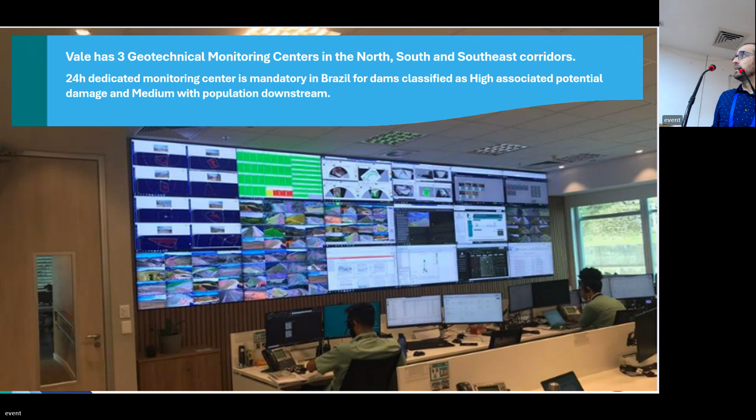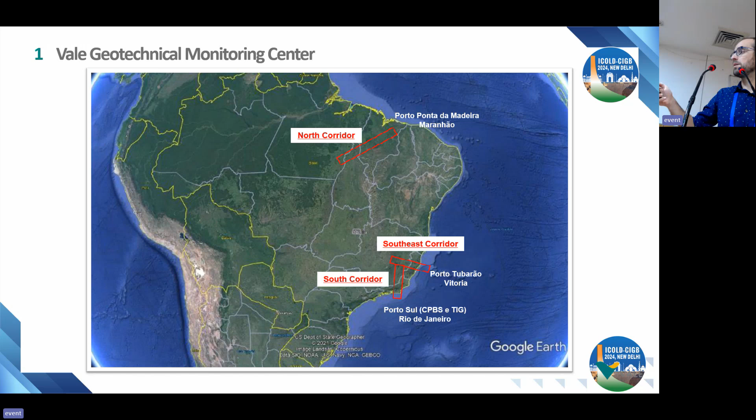So we'll talk about the corridors. They're pretty much what connects the mines, the railroad, and the port. That's why we have three big corridors in Brazil.

This is the team involved with this. We have teams, of course, 24/7 to do all these tasks you can see right here. We also have a geotechnical engineer team. Based on my understanding, AI is not ready to take over the job of these guys, so we don't have to fire them for now, which is good. So it's still human beings doing the data analysis and investigation.

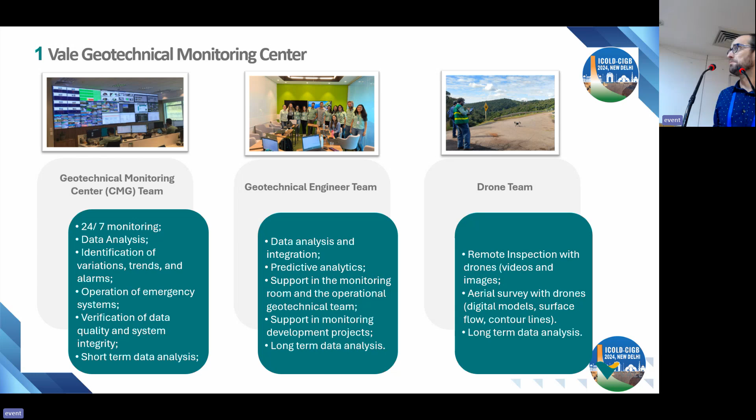And we also have a drone team. Just to show you some numbers: one of the corridors, the South Corridor, does the surveillance of 50 dams, so it's a big quantity.

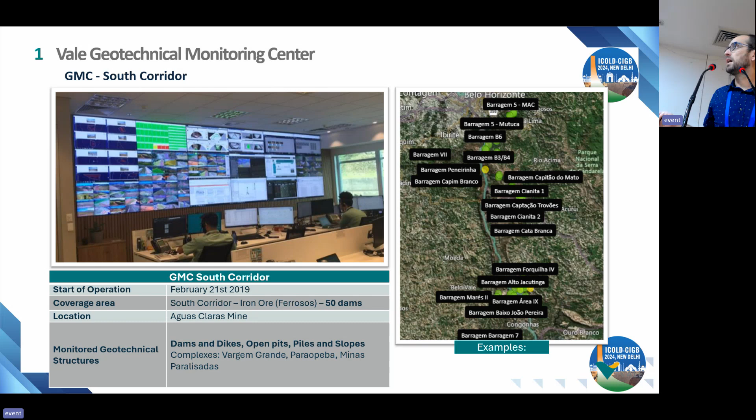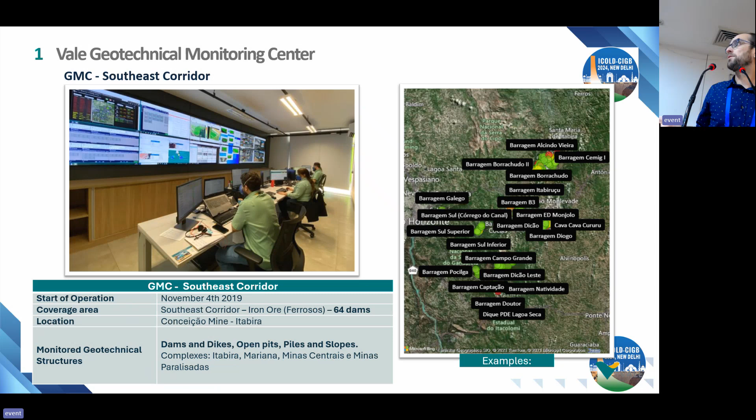So we have big screens. If you come to Brazil to visit, it's pretty interesting. The Southeast corridor covers 64 dams. You can see the start date of operations here - Brumadinho happened in January, and one month later we had this monitoring center in place. This one was set up the same year, and the third one, the North Corridor, one year later.

So today, for dams classified as extreme or very high consequence, we have these monitoring centers.

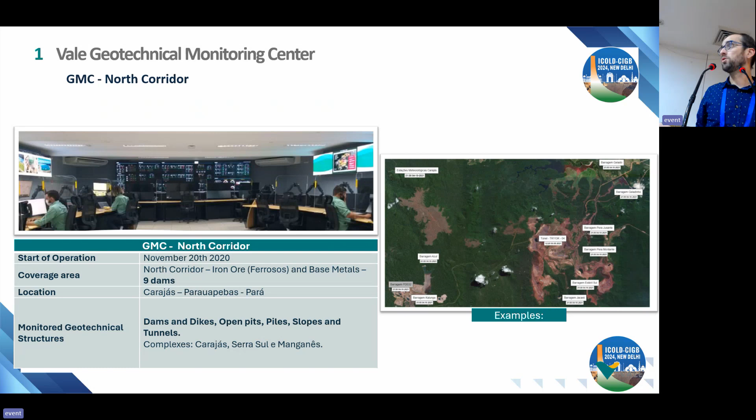And the devices are here, so more quantities and numbers of instruments. As my colleagues here said, they're not here for fun. And of course it would be meaningless to have this quantity if it wasn't connected to a failure mode. So it's not just dropping fancy instruments there - it needs to be connected to a failure mode. I heard this many times here, and I was happy with that, and we do this.

Now, I said I'm the risk guy, so we do risk assessments, and during the risk assessments this is exactly what we do. We also check which instrument can prevent a major failure and detect which one is really important, really critical.

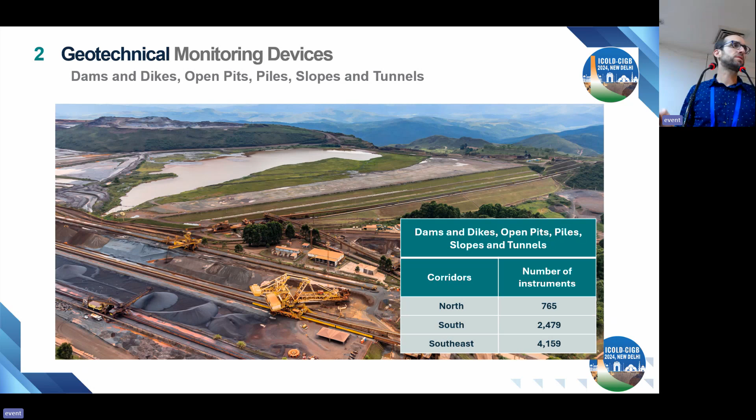So we have another system where we flag a few of them as critical, so they receive more love, let's put it this way.

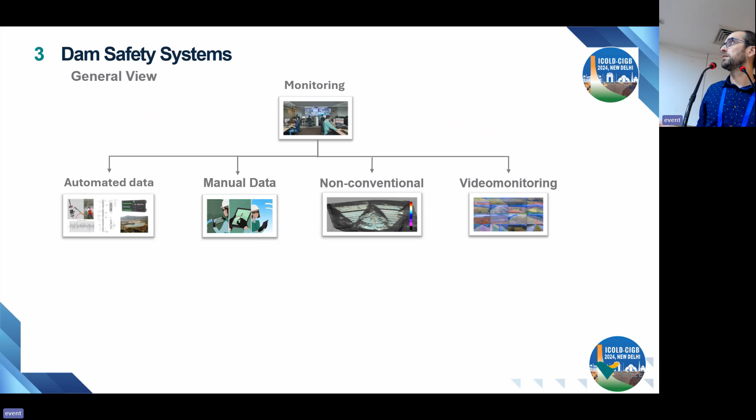In terms of systems, we have automated data, manual data, non-conventional, and video monitoring, and all of them go to this system because we don't use spreadsheets, as we talked about earlier. So we have a system to receive all this data, process it, and also handle site inspections - this inspection also goes inside this system.

And also when maintenance is required, the site engineer will indicate, okay, we need to clean the superficial drainage or cut the grass or whatever. This is the system where that management is done. And the second one is more visual.

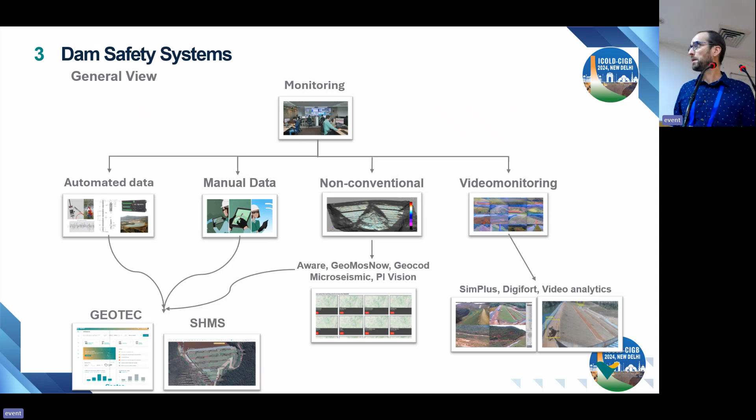It's because all the instruments have thresholds, and when we reach some of the limits, it pops up on the screen of the people monitoring these things. So there's a bit of communication involved.

So we have the Geotechnical Monitoring Center. The EOR has full access to the data, so the EOR doesn't have to ask the site engineer to get the data, because otherwise you could create a filter on this. So he can, I don't know, Sunday evening instead of Netflix, go and see a camera of his dam or her dam, how it is, and how it's behaving.

So we have this full system here, also connected to the RTFE. And also reminder, we also have ITRBs. Of course, ITRBs do not need to have access to look in details, but it's also checking the health of the system.

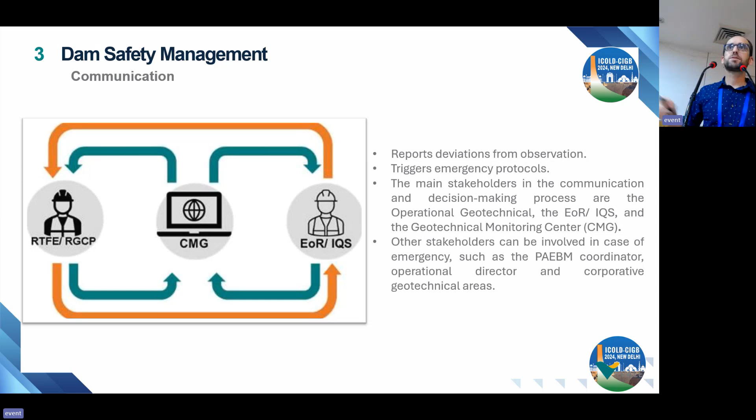And something else happening in Brazil right now: the legislator is asking to have access to the data. So that's something that will happen soon, maybe become a law. Since Brazil sometimes we create new trends in legislation, this is another one coming.

One of the things that's also different in Brazil is the sirens. It's mandatory to have sirens for all dams with extreme and very high consequence. So in Vale we have 380 sirens. It's a hell of a job to maintain and connect all these things.

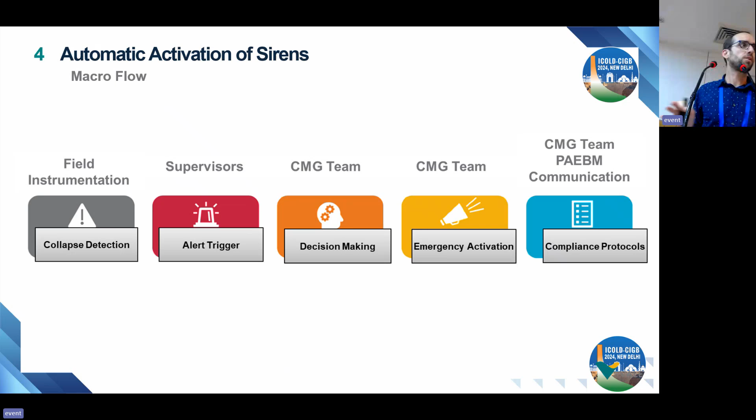So I will show which instruments will detect any collapse, and this is the communication flow, let's put it this way, because it's not just that if an instrument detects something, we still need someone to make sure it's not noise. I'll explain better here.

So I'll show on my remaining slides which are the instruments that automatically activate sirens. One of them is radar, the Doppler, right here. It's automated, but it's not fully connected.

There is a field, it still goes through the monitoring center, because what happened is exactly in this case, we had a bird that came. If it's a bird that goes a certain way, we're not making too much of it, but this bird passed exactly in a way that indicates the dam is falling. So you have someone in the monitoring system get this alarm, and this person does a quick check, sees the camera, and says okay, no, it's false. So we will not activate the sirens, which is a big thing -

because you'd have to evacuate a city of 20,000 people, or rather the affected people there.

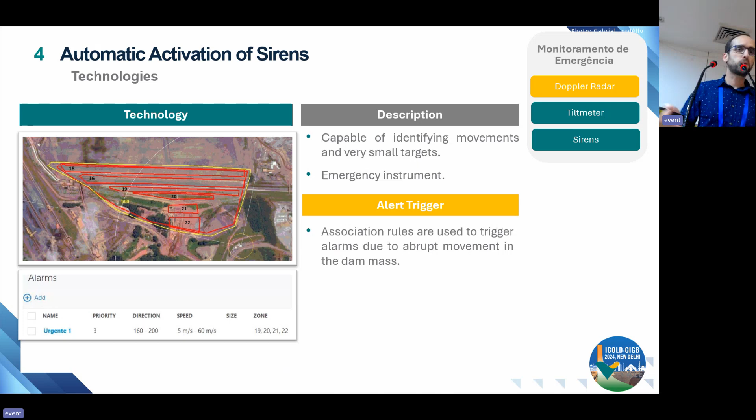And the tiltmeter is another instrument that we use for this. As you know, the alert depends on the variation of the inclination.

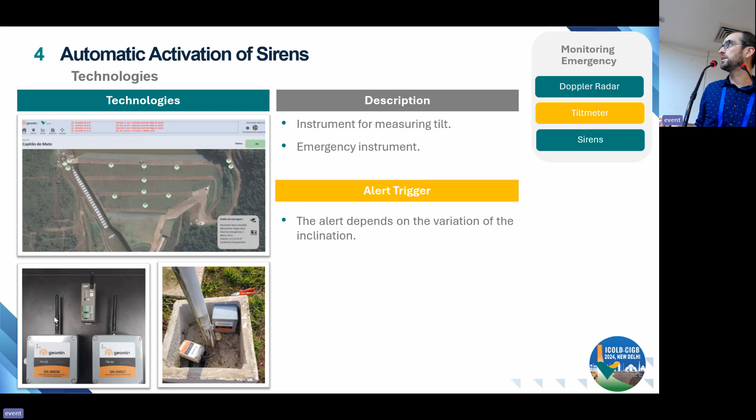And this is my last slide, about the siren itself, confirming what I said here. This is the quantity of sirens that we have, but it's not enough. We are struggling to be able to buy the quantity that we need.

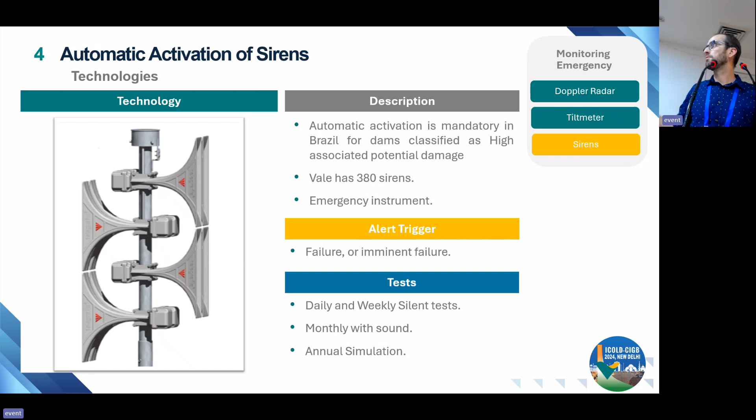So my colleagues went to Norway to find ways, because now we're also trying to integrate all these sirens globally with the government - I think in Norway they have this integrated system. But anyway, I deviated here. The point is, they have silent tests done daily or weekly. We have monthly tests with sound, and annual drills including evacuation of the population, and of course with the sirens being used. So yeah, that's it.

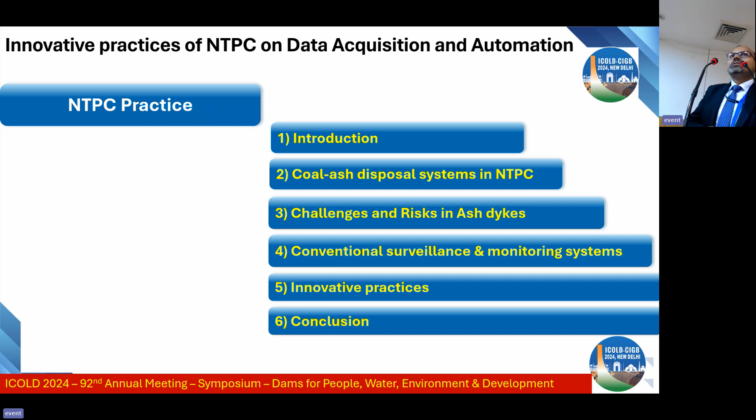In the introduction, you can see the picture.

In typical Indian thermal power plants, we burn coal and ash is generated, coming in two forms. The coarser fraction is bottom ash, around 20%, and the fine fraction is collected in electrostatic precipitators, around 80%. The fine fly ash is in the range of silt to clay particle sizes, having pozzolanic properties, but the bottom ash does not have pozzolanic properties; it is rather medium to fine sand.

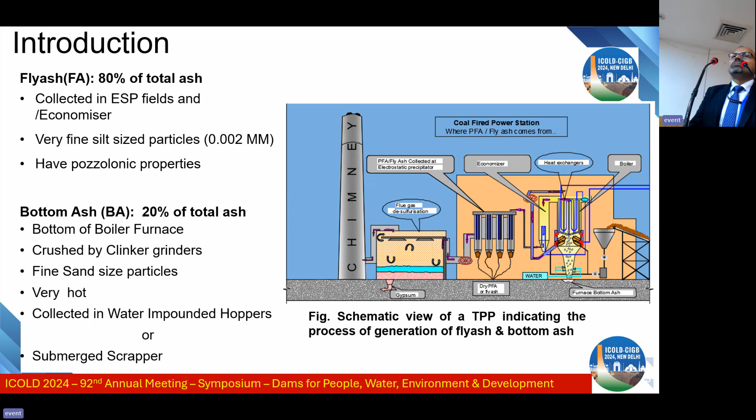Understanding all these properties of fly ash and bottom ash, we are designing our ash dikes as tailing dams, and using these materials in constructing the tailing dams. So what are the different lagoons we are adopting in disposal systems?

At the top right, there are three lagoon systems: two bottom ash lagoons and one HCSD lagoon. HCSD is a high concentrated slurry disposal system which we have evolved in the last 10 years to dispose fly ash, basically to reduce the impact on the water environment by reducing water consumption.

Earlier, we had been disposing ash in the ash pond lagoons using the wet slurry method. With the adoption of this high concentration slurry method, the environmental impact is now minimized.

At the bottom right, you can see different sequential dikes at the periphery, and at the right most there is an overflow lagoon. Initially we construct the starter dam, shown in blue at the starter phase, and then progressively as the ash pond's capacity gets exhausted, we construct raising dikes using the tailing materials itself.

Fine fly ash is used in the raising construction, and bottom ash is used in the internal drainage, chimney blanket, and rock toe filters. This way we are using our tailings in the construction of these tailing dams.

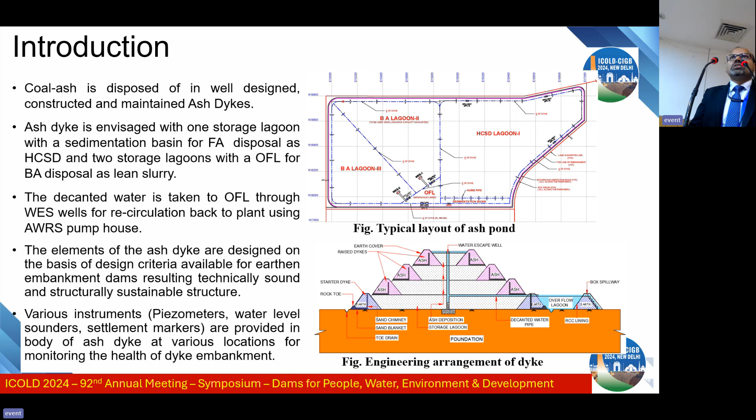So what we are doing is reducing the impact on water also. Initially we take water for making ash slurry, and then continuously recirculate it. This way water consumption is reduced, and by adopting high concentration slurry for fly ash, we are reducing further water requirements.

These are the typical coal ash disposal systems adopted in NTPC. At number one, wet disposal in the ash pond - a typical wet disposal system. Second is the high concentrated slurry disposal system. Third is the dry disposal system, where we create ash mounds.

Recently, we have adopted ash mounds in new plants also. Previously, we have already achieved dry ash mounds up to 55 meters high.

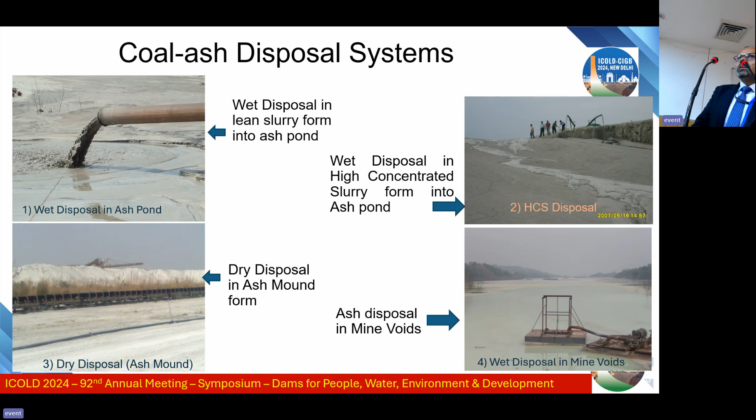And then mine voids - the coal mines from where coal is coming - after abandonment of the mines, we are backfilling them with coal ash as a wet disposal system, reflected in system 4.

There are some geotechnical challenges we face in the ash dikes, which are a kind of tailing dams, related to safety and stability. There are seepages from the dike body, issues of distress and settlement, and issues of longitudinal and transverse cracks, erosion of the downstream slopes, and rain cuts.

During ash evacuation, there is distress in the upstream slopes, and rat holes leading to piping. Non-uniform filling of the ash pond is also creating fugitive dust emission and environmental pollution.

Overfilling above the freeboard level has also been an issue. Vegetation on the downstream slope of the dike body, due to climatic conditions, has also created distress because if huge vegetation is not timely removed, it creates downstream slope failures.

So the conventional surveillance system we have been adopting previously has guidelines for each phase, guidelines for operation and maintenance.

It's a very detailed guideline we have been following, including guidelines for fugitive dust control systems and a checklist for ash dike inspection. In this, there were cross-functional committees from different departments with different exposure levels, physically visiting the sites and taking measurements, and then that data is collected and processed.

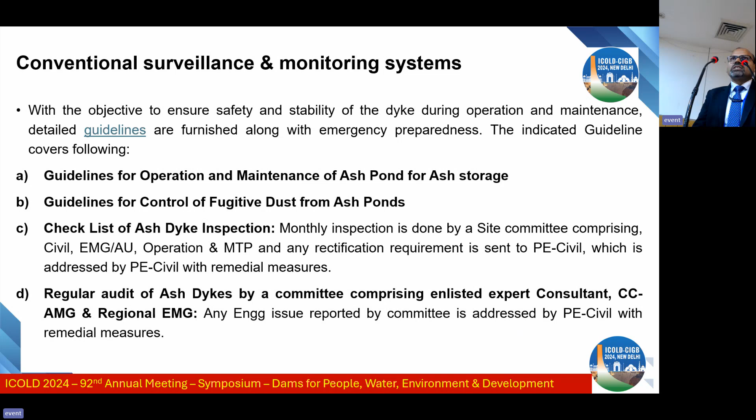Further transmitted to the designer and the responsible people for taking any actions. Regular audits were also conducted, which still continue. This helps in checking any mistakes our in-house team is committing, done through a panel of external experts, including IITs and renowned experts in the field.

The innovative practice we have evolved is that we have digitized one of the monitoring systems. We developed a mobile app, since everybody is using mobile. So it was thought that if we could develop a mobile app and convert the conventional practice of monitoring at the field into putting the data in the mobile app, it can be immediately transferred to the concerned designers and monitors who need to take action.

This innovative practice has helped in digitalization of our estate, and it has reduced the time lag between inspection and report generation. It highlights the issues in different colors so that we can take action.

Even seniors in the organization who are supposed to take decisions, but are not familiar with ash dikes and tailing dams, can go through the alarming signals and signs in the data. We have incorporated red and orange codes - orange is alarming, and red indicates it may create an issue of breach. This way, people at the top level of the organization who are not familiar with ash dikes and tailing dams can understand the criticality of the data and instruct for immediate action to avoid any future distress or breach in the process.

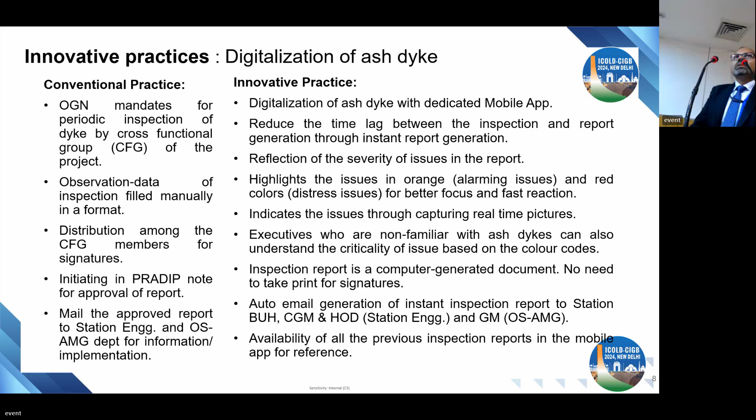These are the lagoon parameters we have identified for the mobile app generation. It's a big list which we have identified to incorporate into the mobile app.

This includes the rolling plan - what is the plan for this particular tailing dam, what is the existing situation, what is the next planning for use, what space is available, whether stability checks are recently done or not, whether mock drills are conducted or not, what are the water levels, what are the design freeboard levels. These are assigned a particular color code.

In the last column you can see there are reference documents for the concerned person if he wants further details on the actual implications of these particular parameters. These are identified and then incorporated in the mobile app.

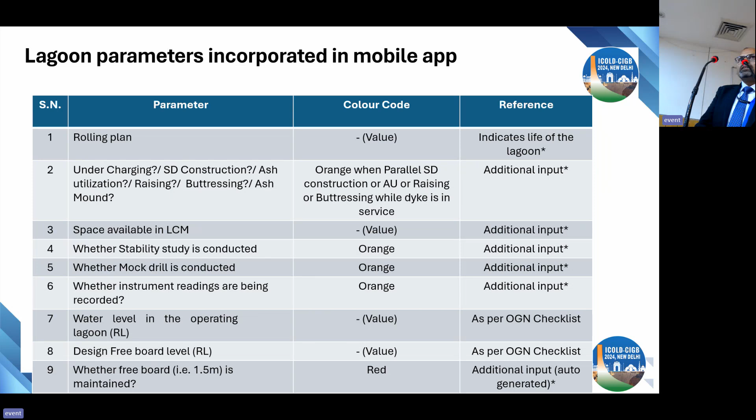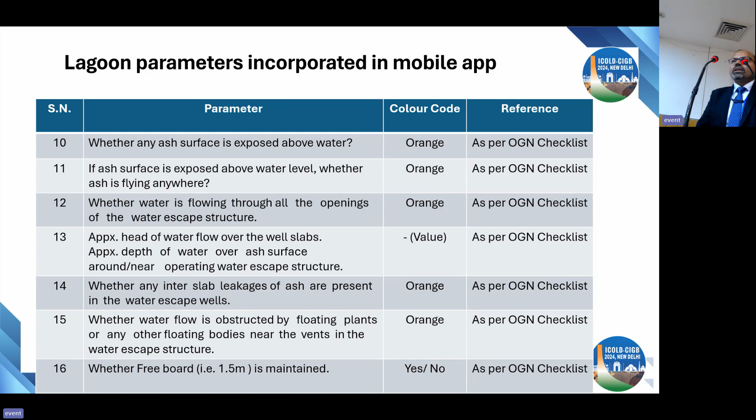Further parameters include whether any ash surface is exposed, and if so, what is the water level. Different parameters are given color codes based on the severity of the issues, with references from where details can be obtained.

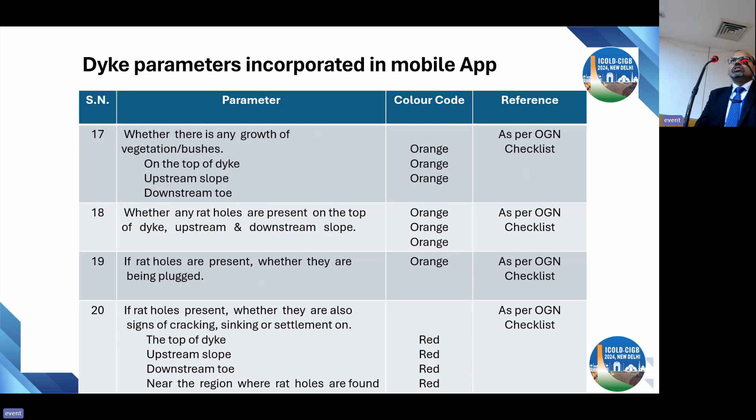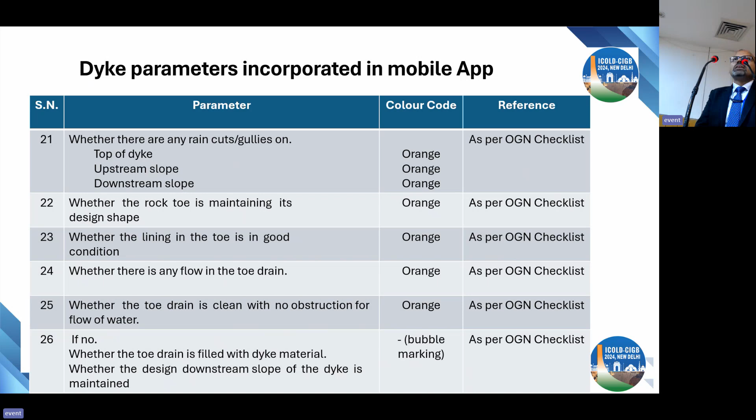Parameters 17 to 20 cover the condition of the upstream slope and downstream slope, and the color code indicating which category it falls into and what alarm it should give based on that. Parameters 21 to 26 cover the top of the dyke - rain cuts, gullies, whether the toe drain is functioning or not, and its condition based on actual site conditions and actual features coming into our ash dykes.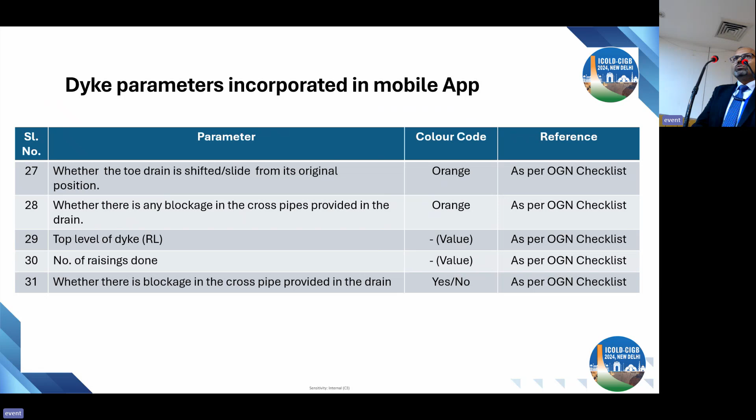This is the screenshot of our mobile app interface, which we are presently using. The name of this mobile app is Ash Dikes Inspection App. There is a team with user IDs and passwords who are responsible and accountable for feeding the data based on instruments installed at the ash dikes, field observations, and other observations taken from drone surveys and photographs.

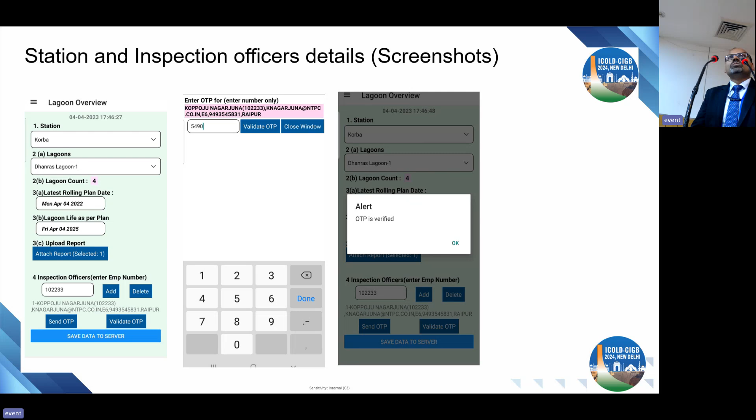So this is the screenshot, and the further the inspection, the data what need to be filled in what format. This is another screenshot, showing in which way it has

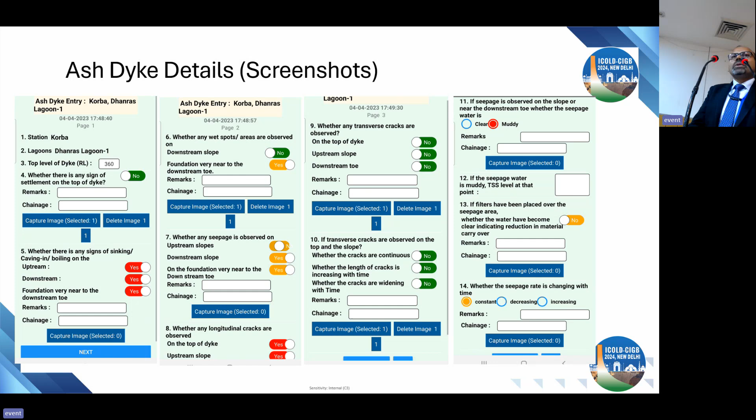been incorporated based on the color codes and based on the parameter severity. Different screenshots I have indicated, just to show you that every parameter identified, how it has been

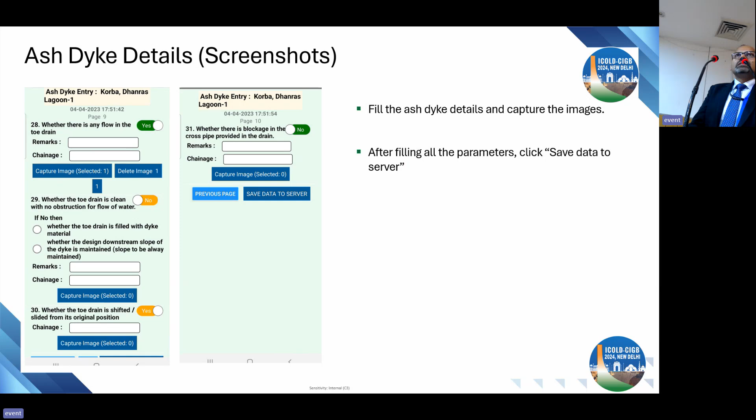incorporated in the app development, so that whatever outcome is coming really reflects what is intended. This is another screenshot. So all the details are filled by the responsible, accountable people at our respective sites, and then this summary report is generated immediately. That summary report highlights

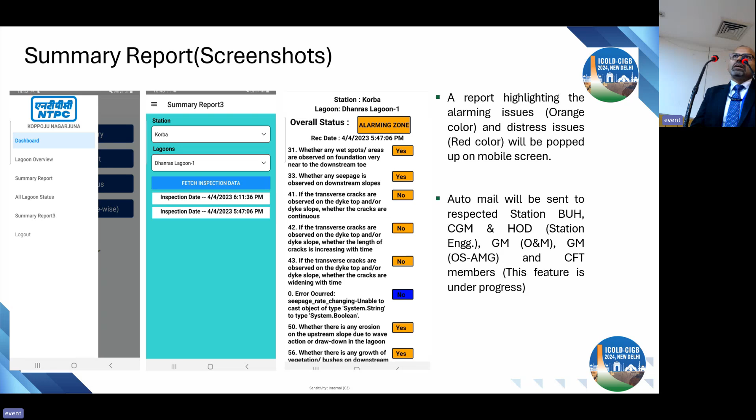these observations in different colors. Based on this, an alarm goes to the respective concerned business unit heads, concerned general managers, the cross-functional team, and designers. Based on the alarm codes of the red signal, it is immediately reflected on the mobile of the designers and the people responsible to take immediate action.

So the conclusions and learnings we have found are that this mobile app helps in sending prompt alerts to all the station engineering and operating stations to timely take action without any lag, whereas our conventional system was creating a lag in data collection and then alarming the concerned people to take action.

It highlights the deviated parameters in different color codes and avoids subjectivity in drawing any inference. Along with the pictures, it gives a better and faster understanding of the issue. And all the previous inspection reports of more than 120 lagoons are available at one place.

So suppose a particular station is creating an alarm, the remaining stations can also be taken as a reference to check whether the similar problem is occurring at other stations or not.

Based on that, our designers and the people responsible for taking action immediately go through all the references. The tab named 'all lagoon status' is provided on the dashboard of the mobile app, and it indicates whether our station is in the safe zone, alarming zone, or distress zone. So with this, it serves as the best platform for future initiatives.

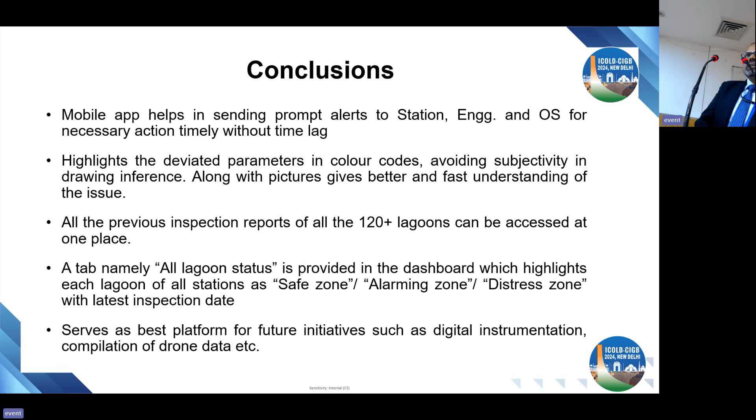What we are taking forward — a lot of learnings I took from previous sessions, that a data logger is there, a lot of other sensors are there — with the help of those, we can further evolve and improve this system. So this was the one system which we recently identified and adopted, and I wanted to share this system with you. Thank you.

So, thanks very much. Thank you. Come over here. Okay? Come over here. Very impressed with that. Thank you. Very, very wonderful.

Okay, one more to go, and then we can pick up and go. But first of all, we've got Brent Randall from Campbell Scientific. Yep, is he here? Yep, okay Brent. So Brent is an application engineer of geotechnical instrumentation at Campbell Scientific. So he'll lead us through what they're up to. Thanks, Brent.

Thank you. Because this is the last presentation of the day, I'd like to try and get us out of here a little quicker, so I've condensed it from 3 hours to 2.5 hours for everybody. So we'll see if we can make some good time here. See if I can get this. All right, so

I'm going to talk today about a case study on vibrating wire sensors. Vibrating wire sensors can be noisy under certain conditions, and it makes the data questionable. So we're going to talk about this case study of how to eliminate it.

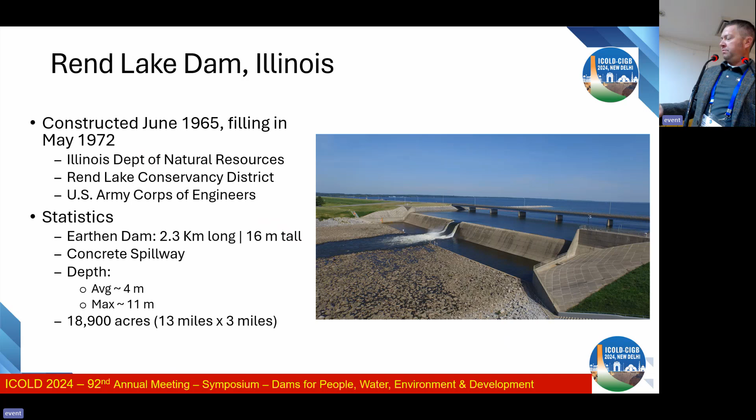So this is Rend Lake. We went out and worked with the Corps of Engineers to do a case study to test the monitoring system they had and see if we could improve it. When you look at the dam, you can see the concrete spillway portion here is really a small part of the dam.

I'm just curious, by a raise of hands, how many of you have seen noise in vibrating wire data before on your systems? Okay, so this is not an unfamiliar experience.

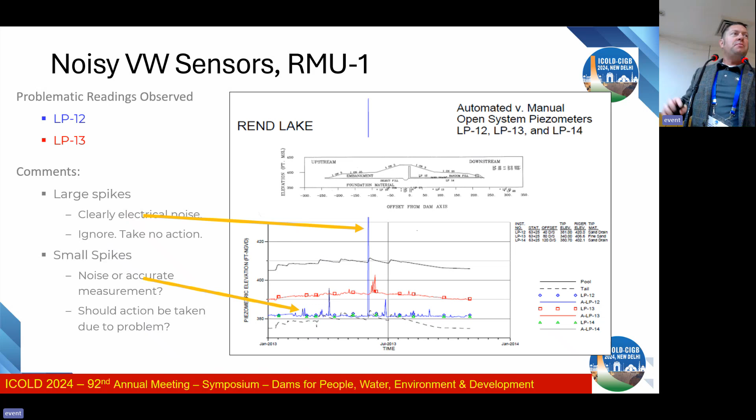So these spikes are questionable. When you've got some spikes in the dam that are lower than the reservoir level, that's concerning. That could be piping, but if it's a noisy sensor, it's kind of the boy who cried wolf - you don't know if it's bad data or piping. When you've got spikes that show pore pressure far above the lake level, it's pretty safe to say that's not real data. So the sensors really have become questionable.

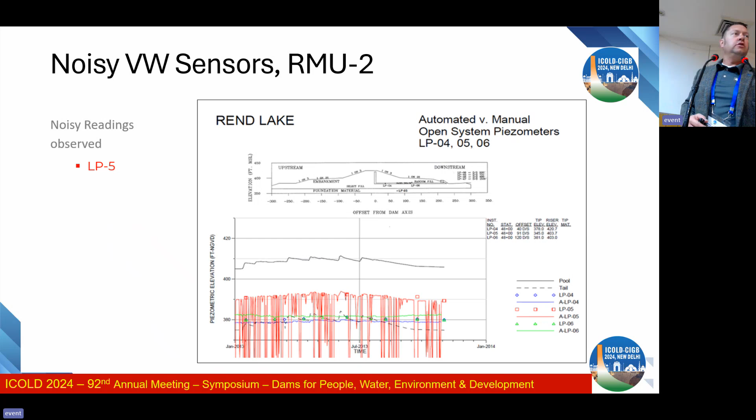The other station was showing dips. They only had one sensor here that was bad, but it would dip very, very badly. Pretty sure we didn't suddenly lose pore pressure in the dam, so that's a known bad sensor.

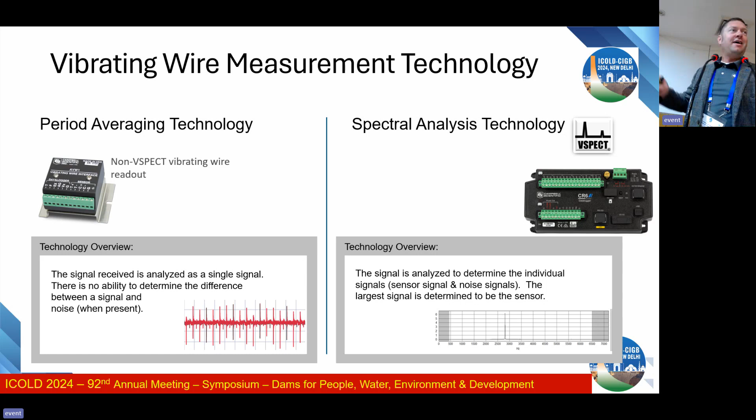So what we did is we went out, and they had an older technology that's based on period averaging. I'm going to explain how these technologies work to analyze vibrating wire sensors. We replaced that old technology with a new technology called spectral analysis. If you're like me, I remember doing fast Fourier transforms in school - I couldn't do them today. They're all automated, and that's how we get the spectral analysis technology.

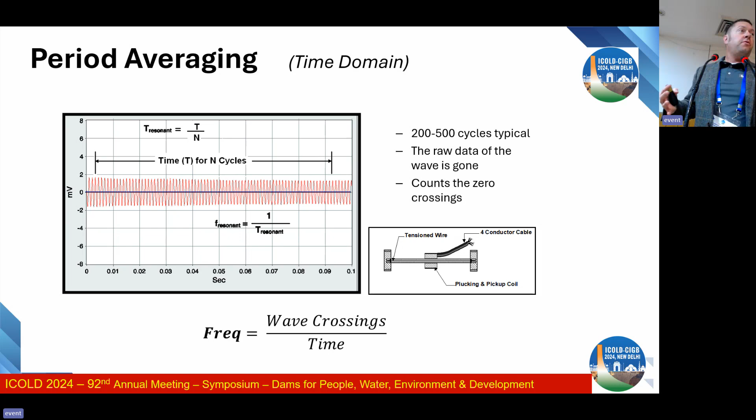So let's look at period averaging, the older style technology. What happens is you get a vibrating wire signal that's a frequency signal, it's a voltage. As that signal crosses 0 volts, the data logger will count how many crossings it has, and the number of crossings over time is how you determine frequency. It's a pretty simple method, and it works really well in many conditions.

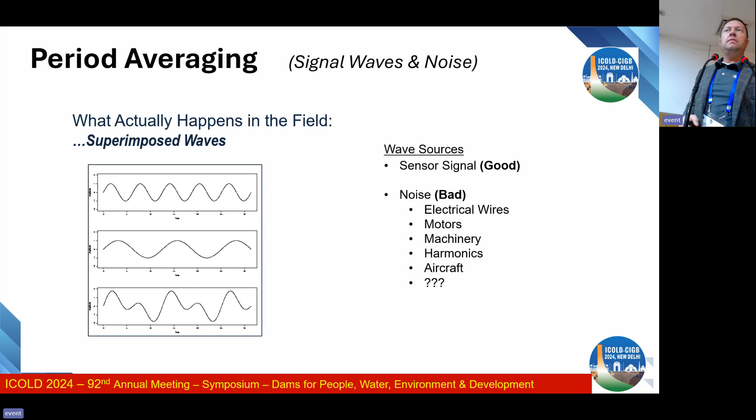But what happens? Why do we get noise? Well, what you have is a sensor signal, and then you get some additional signal that comes in - noise. It can come from electric motors, and power lines are one of the most common noise sources. For some reason, a lot of dam engineers like to locate power plants on dams, which complicates some of those measurements. So by the time the sensor and the noise signal get back to the data logger, the signal the data logger receives is not the same signal that the sensor output. When you look back at that original sensor signal and introduce noise, there are a lot of 0 crossings that were incorrectly identified or missed. That's period averaging.

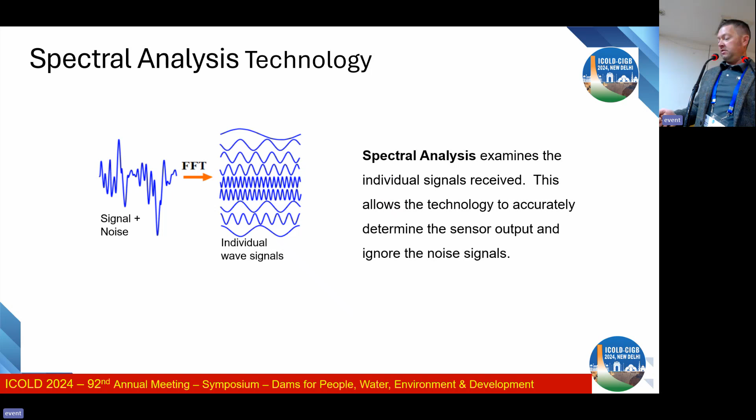So spectral analysis is a little bit different. It receives this complex signal with lots of different waveforms in it, and it performs a fast Fourier transform, breaking it down mathematically into individual signals. Then we can look at that and determine which one of those signals is the sensor, and we ignore the rest of the noise. We don't get rid of the noise - we see it, we just choose not to interpret that as sensor data. There are 2 ways to look at that.

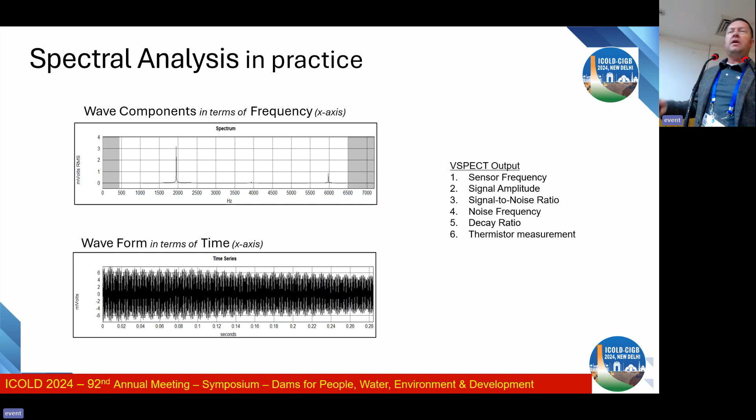We'll look at a couple different sensor outputs from the dam and help you guys see how those work. So what we did is we switched out 2 of the stations to the new technology that uses spectral analysis, and we left one of the stations with the old technology.

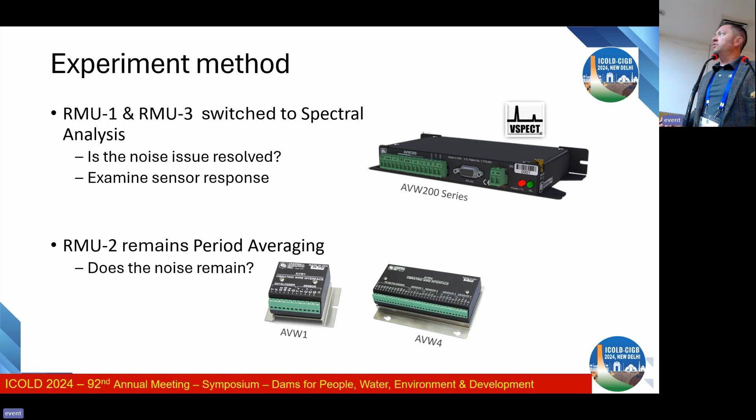We wanted to leave that as a control point to make sure the noise continued and we didn't suddenly get good measurements. We wanted to make sure it was a good test. So moving forward, while we were out there, we did a bunch of analysis on the individual sensors.

This right here is what I would call a textbook perfect vibrating wire sensor. No noise was coming in. You have a very clean signal that goes back and forth, and that signal is one key frequency at about 2,800 hertz. That would be a typical response from a piezometer. Let's look at some other signals and compare. This is another sensor—again, very good signal, with one core frequency. I would describe this as a good sensor.

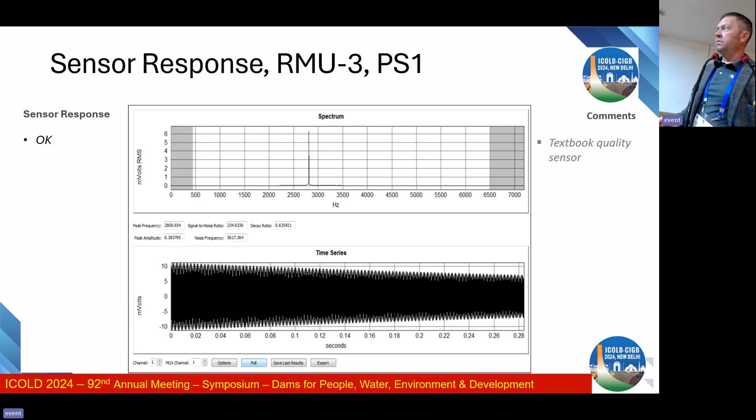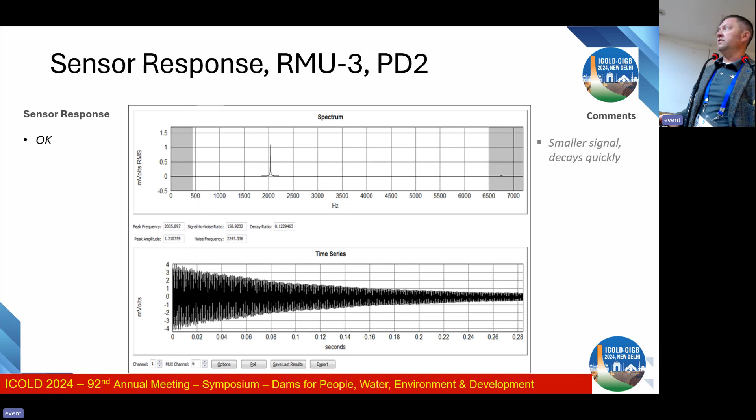Now I'm going to jump back and forth between these two and help you see some differences. Notice this sensor has a strong signal that continues for a long period of time. This sensor gets quiet quickly—that signal gets small. That's fine. Every single vibrating wire sensor you get will behave slightly different. That doesn't mean it's a bad sensor, it means it's a unique scientific sensing device. Nothing concerning there to me.

All right, let's look at another sensor. Again, you have the time domain, and now you've got two big signals and one little tiny signal there. This is the main sensor signal, a little bit less than 2000 hertz, still pretty normal response for a piezometer. And then you've got a signal at 6000 hertz. Can anybody tell me why that is significant, that it's 2000 hertz and 6000 hertz?

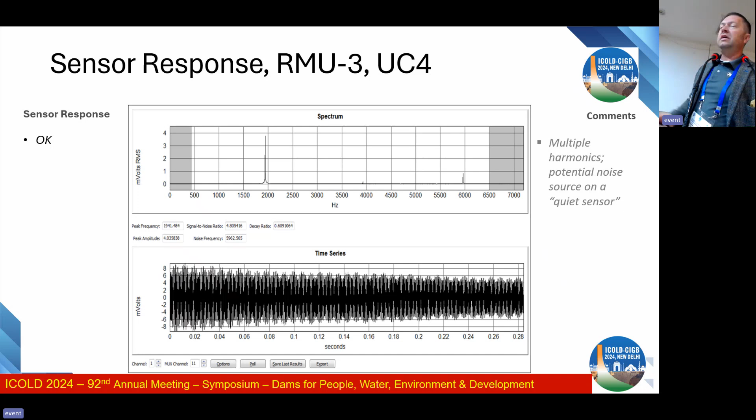Anybody heard of harmonics? When you play a piano and hit the C note, that note has some level of other C notes on the piano. That's what's going on here. You've got the main sensor, and then a harmonic, and it's visible because if you multiply that main signal by an integer, you come out with the harmonics. So 2000 times 2 is roughly 4000—you can see a little harmonic there, but the next harmonic is more common. Is this bad? No, it's totally normal on vibrating wire sensors. It's fine, but with the ability to see it, we can eliminate any influence from the harmonics.

This is one of the sensors that was a real problem sensor on the site. When we were on site, it showed some evidence of where the noise source was coming from. Remember, that noise was sporadic, so it wasn't present all the time, and we just randomly sampled it. First we took a measurement here—it looks a little different than the others. When you look at the frequency domain, you can see one key signal right here.

That would be the sensor. And then down here you have another spike. When you go down, that spike comes out at about 60 hertz. Why would that be significant? Any guesses? AC power—you got it. In the United States, where this dam is located, the AC power grid is 60 hertz. So anytime I see any sort of noise source in the 60 hertz or 50 hertz range, depending on where you live, I'm going to say, yep, we've got some AC power noise here.

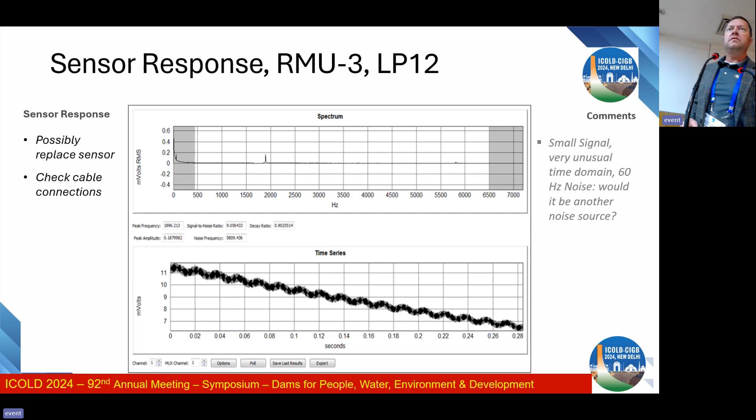Now that noise is present, and when you look at this, you can see the sensor signal going up and down fast, and then you can see this slower wave right there. If you were to look from the top of that wave to the top of that wave, it would be 1/60th of a second, and that is the influence of AC noise.

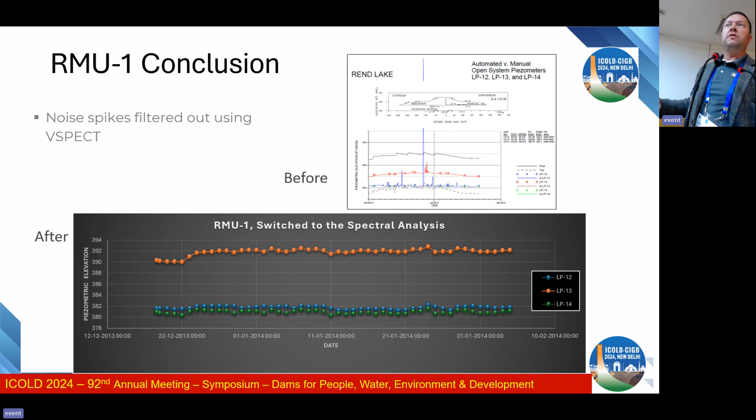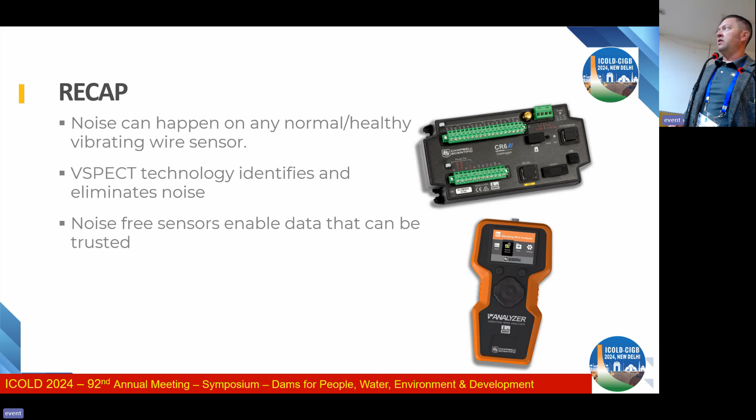So what happened with the case study? When you switched to VSPECT technology on RMU1, where we switched to the new technology, your old data had spikes on the red and blue sensors, and now the data matched what you would expect—it matched the trends associated with the lake level. The other station that was left with the old technology had these dips in data, and those dips continued to exist. So the site conditions did not change. The noise didn't go away, but we were able to read the full sensor and filter out the noise with the switch in technology. That's how we interpret vibrating wire sensors and eliminate noise.